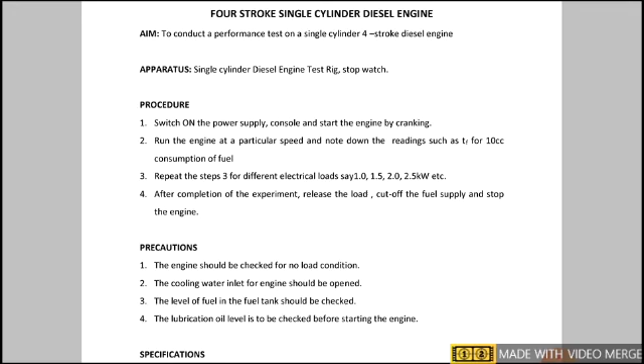The procedure to be followed for this experiment: switch on the power supply console and start the engine by cranking. Run the engine at a particular speed and note down the readings such as time taken for 10 cc of fuel consumption. Then repeat the steps for different load conditions like 1 kilowatt, 1.5, 2, 2.5 kilowatt, etc.

After completion of the experiment, release the load, cut off the fuel supply and stop the engine. Once we are going to change the electrical loadings, we need to note down different readings such as the manometer reading and the fuel consumption reading along with the engine speed.

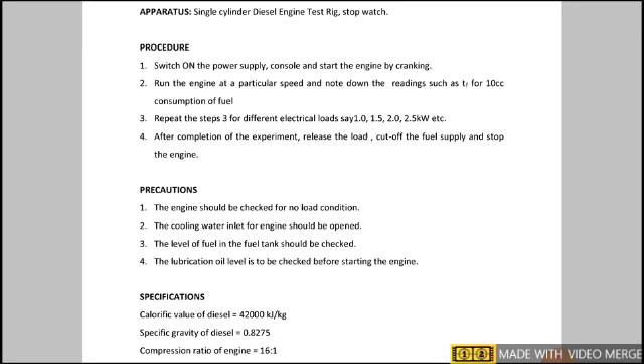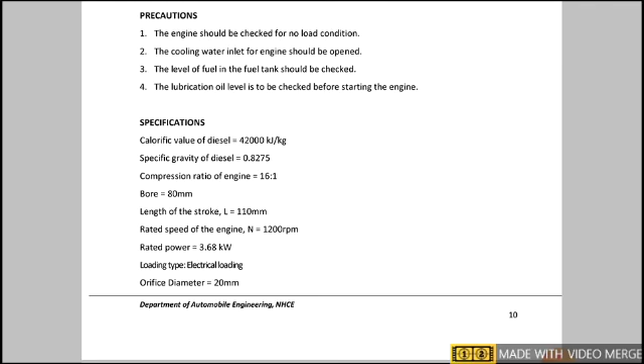The precautions to be carried out for this experiment are: the engine should be checked for no load condition, the cooling water inlet for the engine should be opened, the level of fuel in the fuel tank should be checked, and lubricating oil level is to be checked before starting the engine. You can note down the type of engine and the specifications you are using.

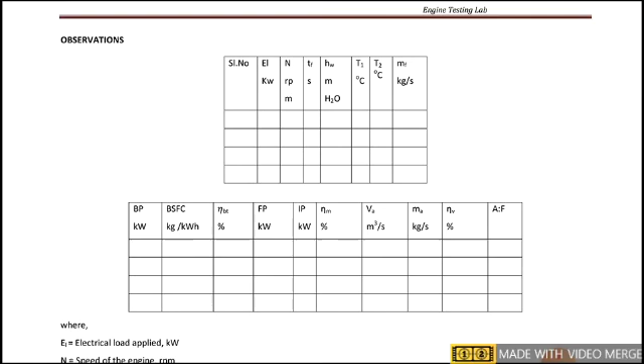These are the observations: the electrical loading, the speed, the manometer reading, the temperature input and output, the mass of fuel, the BP, BSFC, brake thermal efficiency - different parameters to be calculated.

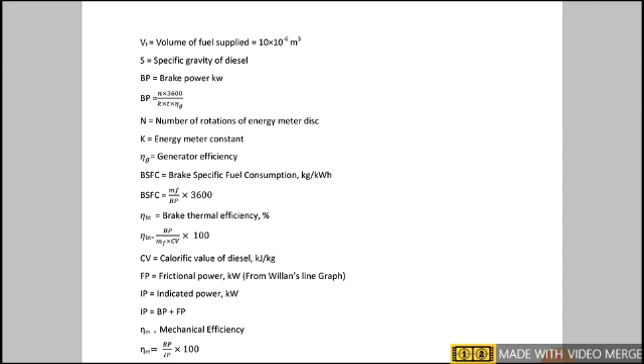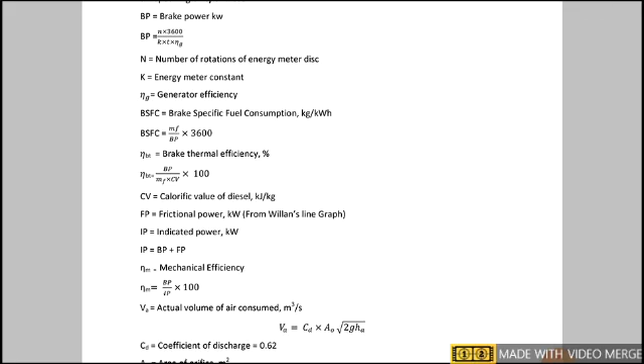These are the calculations, the observations which may require some formulas. These formulas or calculations are very much required to perform the experiment. You can see various formulas for BSFC, brake thermal efficiency, and how to find out FP, the frictional power.

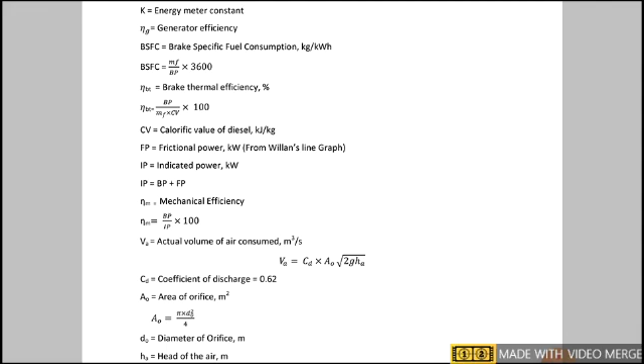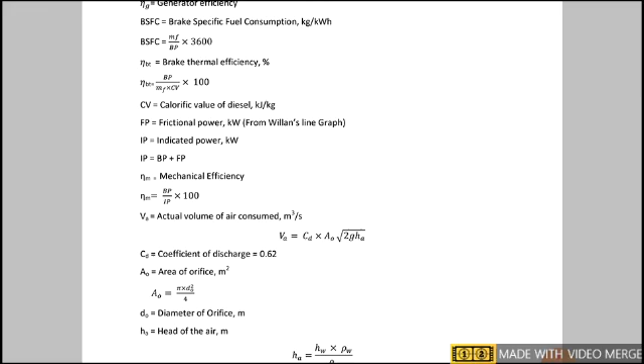The frictional power is from Willan's line method or Willan's graph method. We know the relationship IP equals BP plus FP, where IP is the indicated power, BP is the brake power, and FP is frictional power. The BP will be obtained from the alternator output and the FP from the Willan's line method.

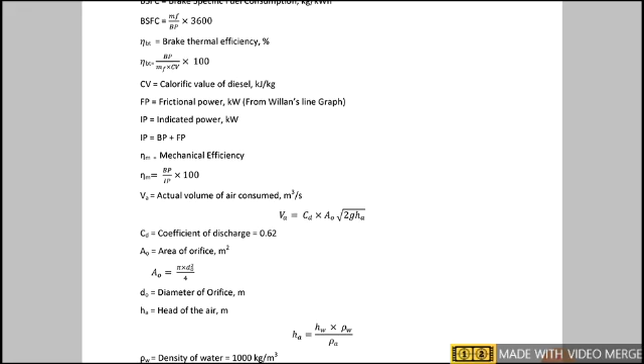Once you have these two, you can find out IP. The mechanical efficiency is BP by IP.

V suffix A is how to find out the volume of air. The formula is CD into A into root of 2GH, where CD is the coefficient of discharge of an orifice, A is the area of the orifice, G is 9.81, and HA is the height of the air column.

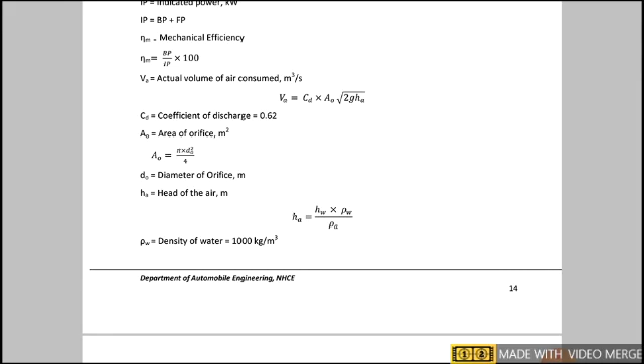These are the formulas we are using to perform the experiment.

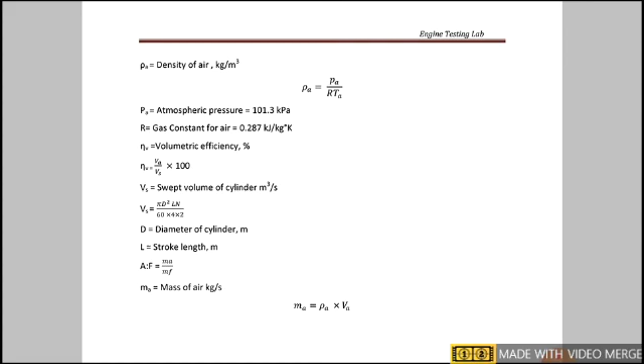Once you find out all this calculation part and get the readings, you need to plot various graphs such as air fuel ratio versus BP and BSFC versus BP. These graphs show the trend with respect to load conditions.

For example, if the load increases, what happens to the air fuel ratio, whether it increases or decreases. Knowing the trend is very important with respect to IC engine testing or performance testing. Thank you.

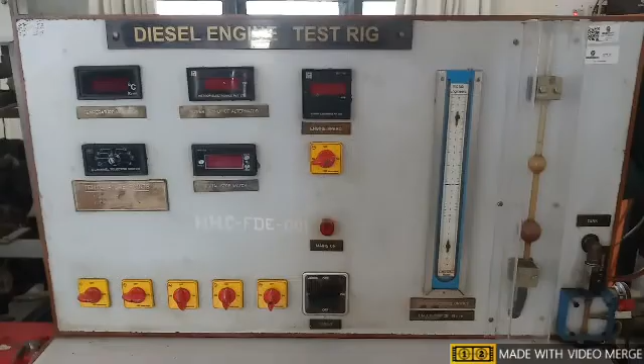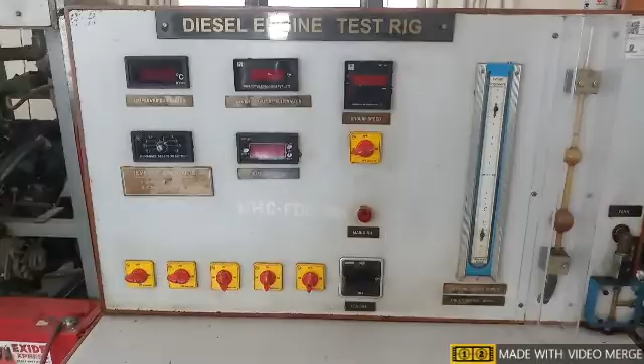Hello everyone. This experiment is on a single cylinder diesel engine. The aim of this experiment is to find out the performance test with respect to various factors like the power output, the torque, the fuel consumption, and so on.

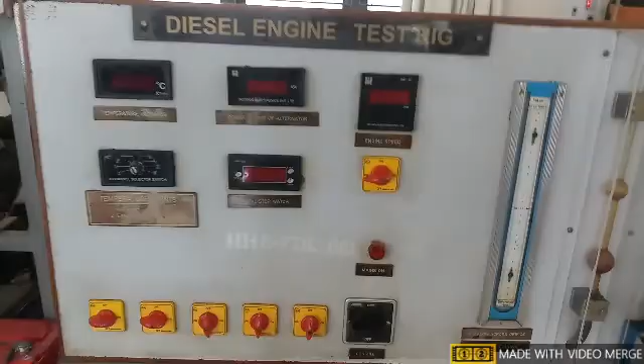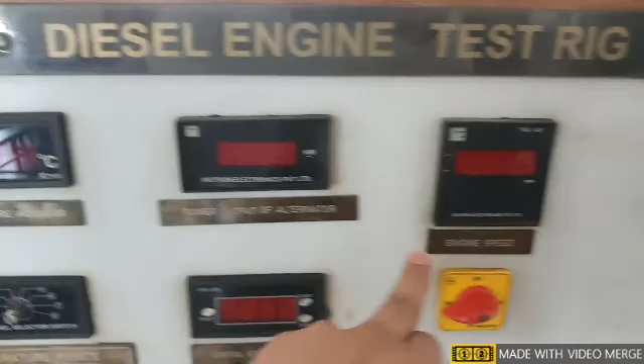This is called the test rig. You can note down various readings here: the temperature indicator, the brake power or power output of the alternator, and the engine speed. You can check and vary the adjustments with respect to temperature here.

Here we have the digital stopwatch, and these are the switches where you can increase the load, using electrical loading. We have different types of loading with respect to engines, such as hydraulic loading, mechanical loading and electrical loading. What we are using here is electrical loading.

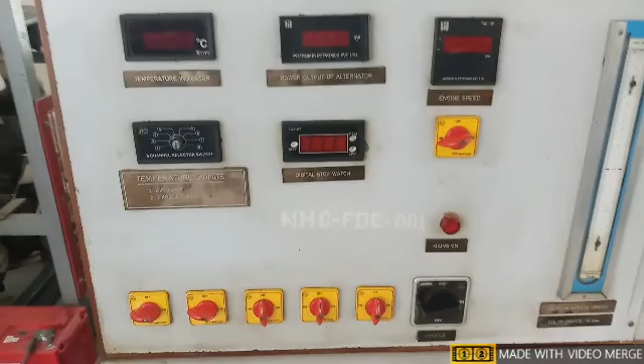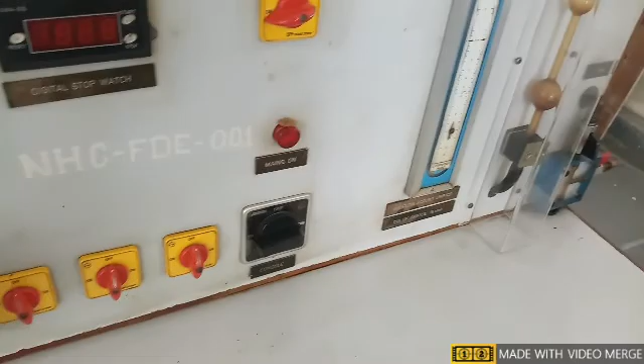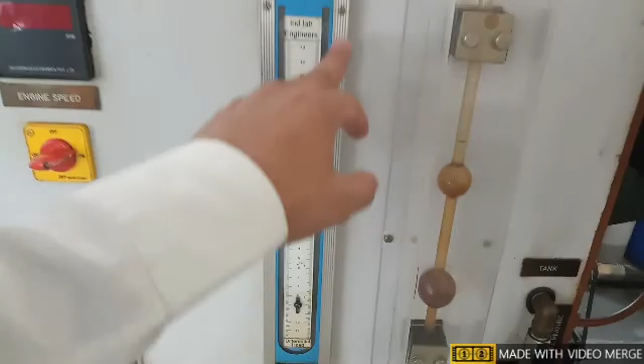It is 0.5 kilowatts, then it goes to 1.5 to 2.5 kilowatts. Once you increase the loads, you can see various fluctuations with respect to the power output as well as speed. We also have a U-tube manometer here which records the airflow reading.

Another thing you can see here is the burette where the fuel will be collected directly from the tank.

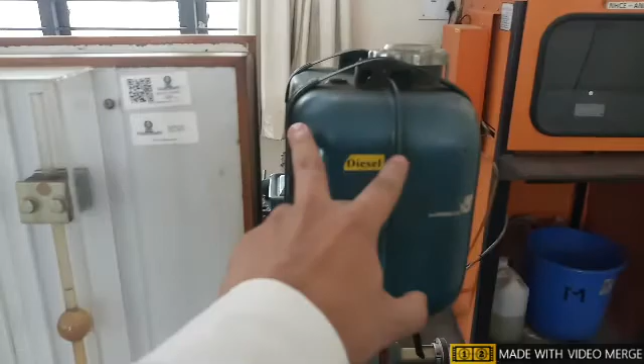The fuel we are using here is diesel. It is a single cylinder diesel engine, where the fuel will be topped up in the tank, then that will be coming into the burette.

Then we have the control here with respect to the fuel, to switch it off and on into the engine.

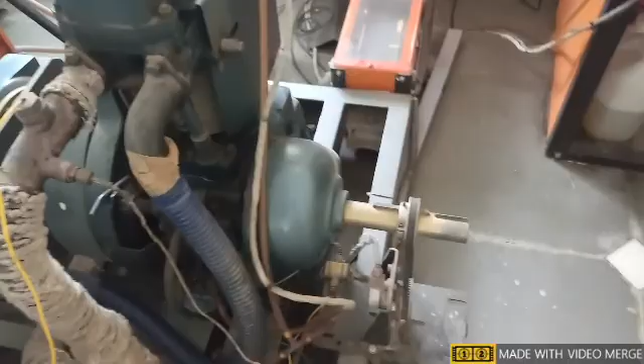You can see here, this is the flywheel and this is the injector, and this engine is started with a manual crank or hand crank. We can start the engine from the hand crank lever of the engine.

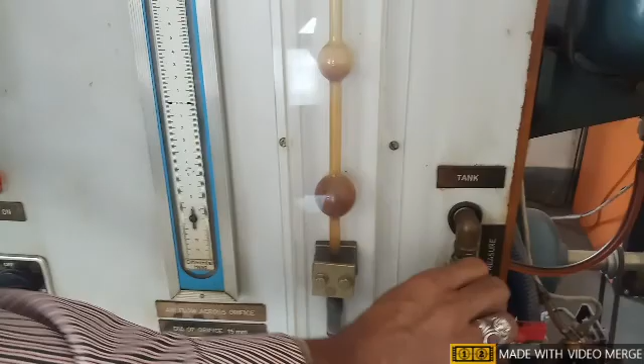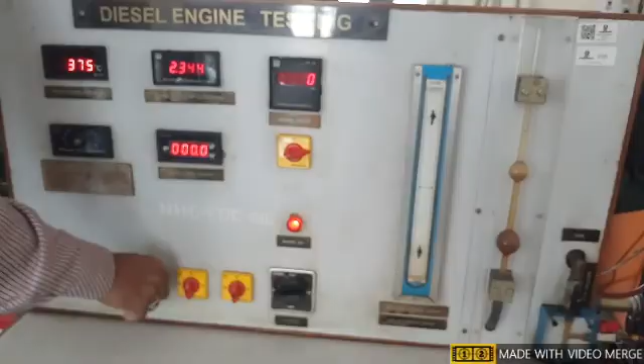So that is how you are going to carry out or perform the experiment. Depending upon which parameters you need to find, on that basis you will be having the formulas.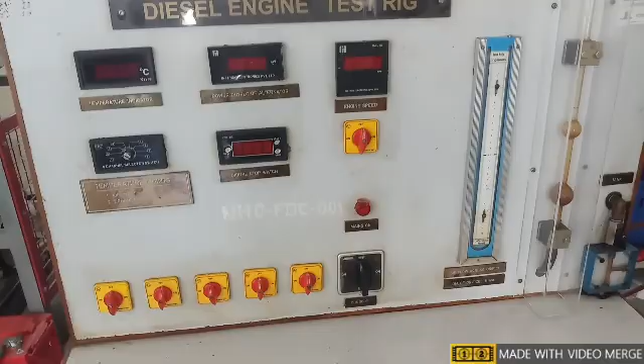From those formulas you can find out the different powers like brake power, FP frictional power and other kinds of powers, similarly the efficiencies. That is what you are going to conduct.

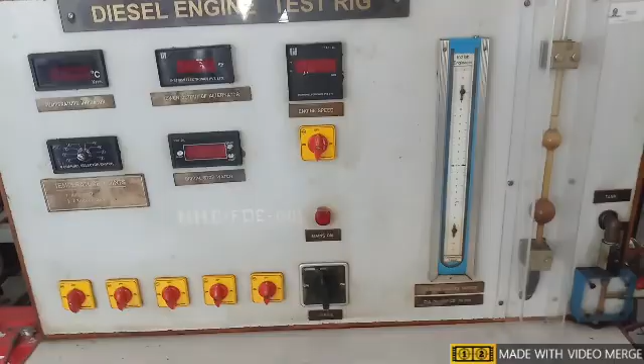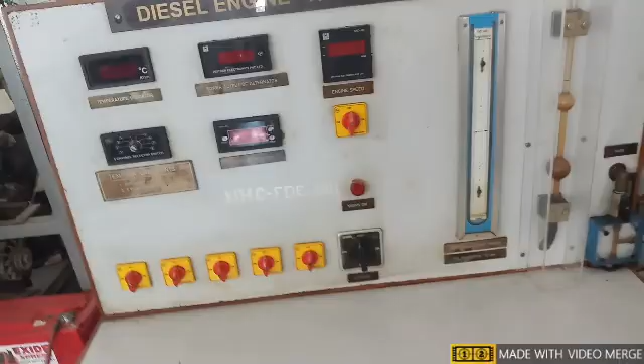Similarly, you are going to conduct the performance test on multi-cylinder engines also, multi-cylinder diesel engine or multi-cylinder petrol engine. For those engines also you will be following the same parameters or same experiment procedure to conduct the experiment. Thank you.